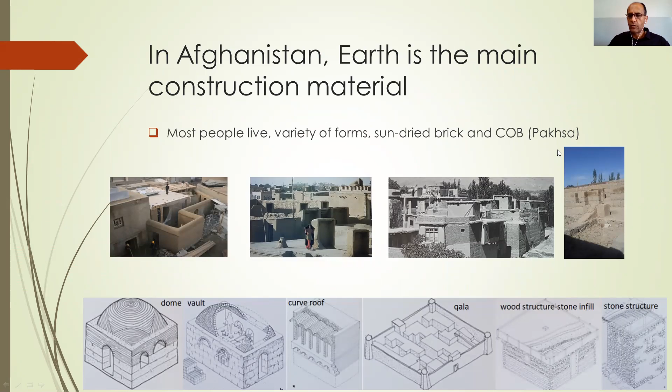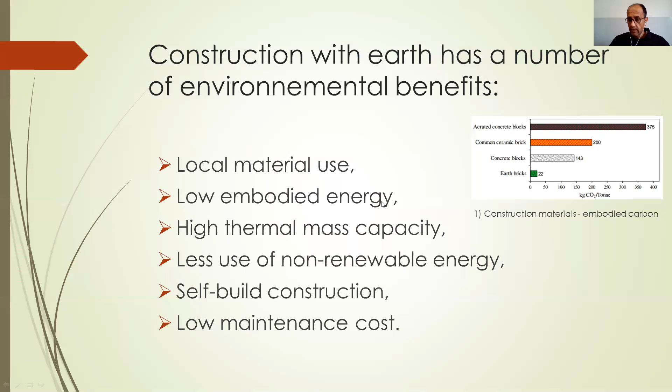Construction with earth has a number of environmental benefits, such as local material use and low embodied energy. As you can see here, earth brick has the lowest embodied energy compared to concrete. High thermal mass capacity, less use of non-renewable energy, self-built construction, and importantly, low maintenance cost.

In Kabul city, there were two rapid demographic changes. One occurred in 1979 and the other in 2001. This meant that we need to build a lot of affordable housing for people who migrated to Kabul. In 1979, when Russia attacked Afghanistan, all the people came to Kabul city. We can see in the graph there's a very rapid change.

Later in 2001, when the US Army came to Afghanistan, again a lot of people migrated to Kabul city, mainly for security reasons. There were better job opportunities and better education for their children.

Now in Kabul, around 70% of the houses are informal settlements. As you can see, they are all made with traditional earth elements, but we also have those people who can afford to use some modern materials. For Kabul city, based on UN Habitat, we need 41,000 houses to be built between 2015 and 2025.

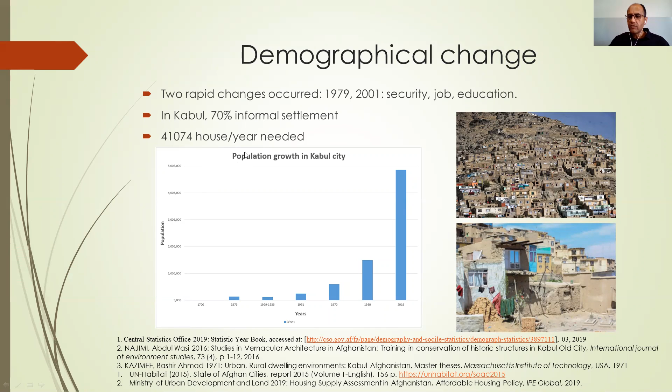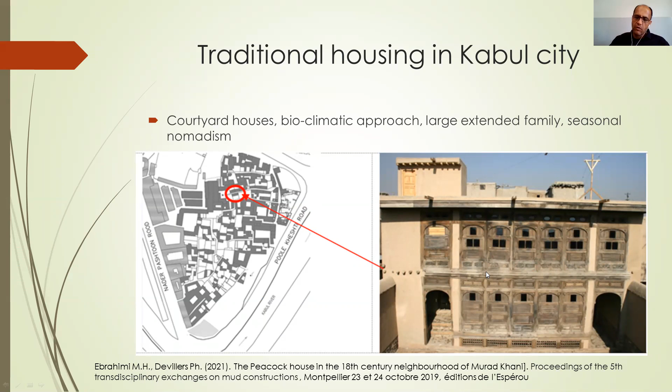For traditional housing in Kabul city, we have mainly courtyard houses. These courtyard houses have a bioclimatic approach. We can see on the south face we have a peak which prevents sun during summer and lets the sun enter the rooms during winter. We live in large and extended families, and we have south-facing rooms like this, which we benefit from during the winter, and north-facing rooms for summer.

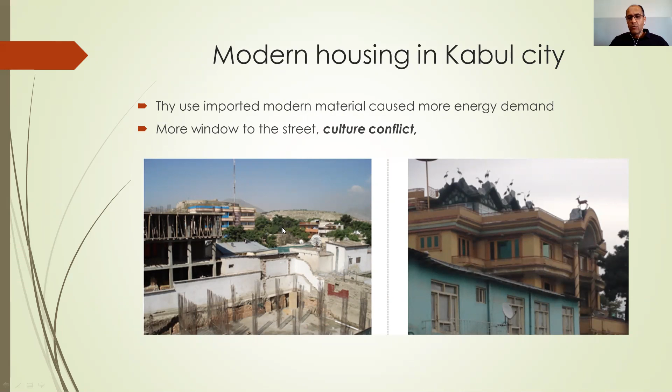The use of imported modern materials like concrete and steel, as we see in the structure, caused more energy demand for housing. We can see a lot of the houses newly built in Kabul use modern materials. They don't use a bioclimatic approach. There are a lot of windows facing the street. It's really a cultural conflict. So we need to use traditional materials rather than these modern materials.

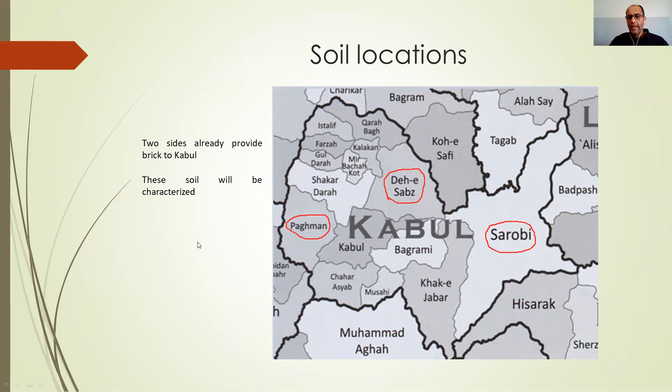For the soil location, we use three types of soil from 3 districts. 2 of these districts, Paghman and Deh-e Sabz, already provide bricks to the center of Kabul city. These soils will be characterized later in the other slides.

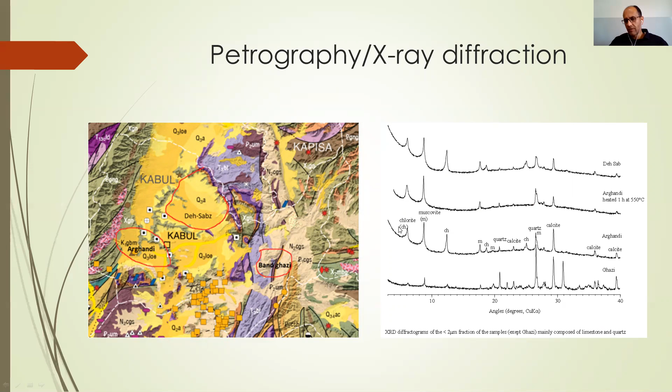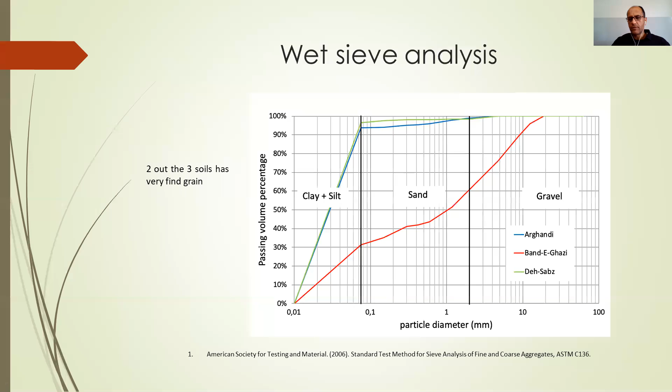Wet sieve analysis was performed to find the particle size distribution. 2 out of the 3 soils have very fine grain, Deh-Sabz and Arghandi. Deh-Sabz has almost 98% clay and silt, while Arghandi has 93.5%. They are both more than 90%. But Band-e-Ghazi is a well-graded soil, as we can see. For the Atterberg limits, we can see all 3 soils are slightly plastic.

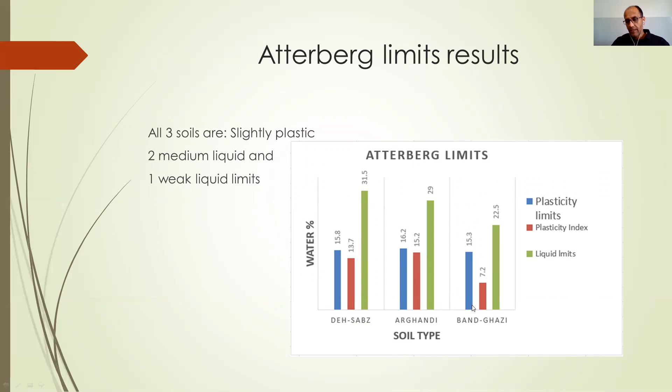The plastic index shows that they are slightly plastic. And Deh-Sabz and Arghandi have medium liquid limits, where Band-E-Ghazi has weak liquid limits.

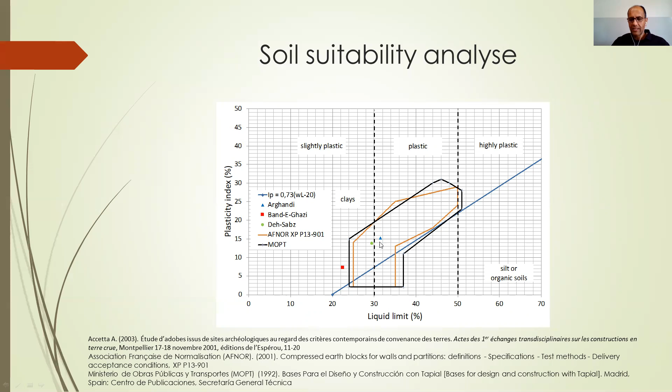For the soil suitability analysis, we use the AFNOR French code and the MOPT Spanish code. Both have developed polygons and show those soils which fit inside based on their liquid limit and plasticity index. They are suitable. We can see the soils are around there or inside this polygon.

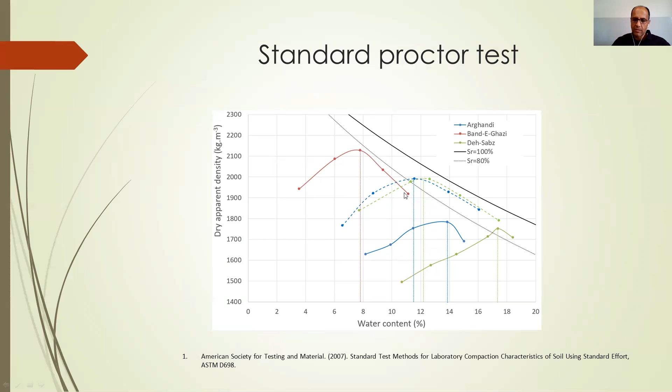This dashed blue and green line shows the reconstituted soil, because for compressed stabilized earth blocks, which use cement, these two soils are very, very fine grained. There's not a lot of sand, so we used around 75% sand with this, and this is the result for the dry density.

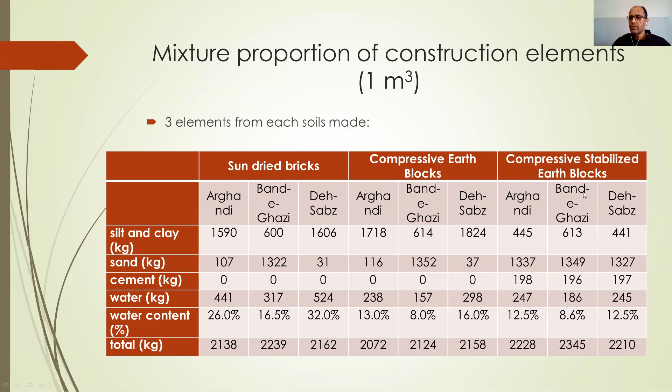For the mixture proportion, from those three soils, we developed three types of elements, like sun-dried bricks, which we use traditionally, and two modern elements like compressed earth blocks and compressed stabilized earth blocks, to which we add cement.

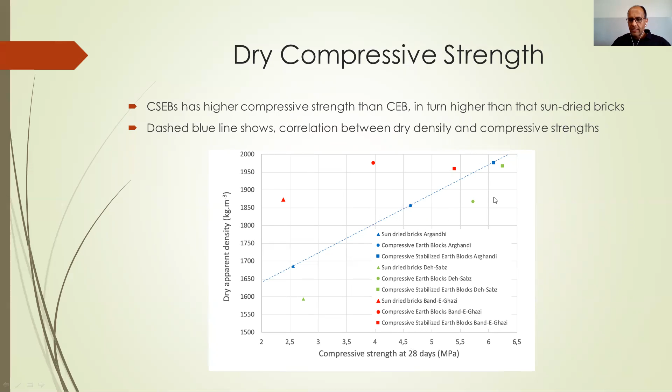The dry compressive strength of these three elements, sun-dried brick, compressed earth block, and compressed stabilized earth blocks, shows that CSEB, which has cement, has higher compressive strength than CEB without cement, and in turn, CEB has higher compressive strength than sun-dried bricks. This dashed blue line shows the correlation between dry density and compressive strength. The more the dry density is, the more compressive strength we get out of these elements.

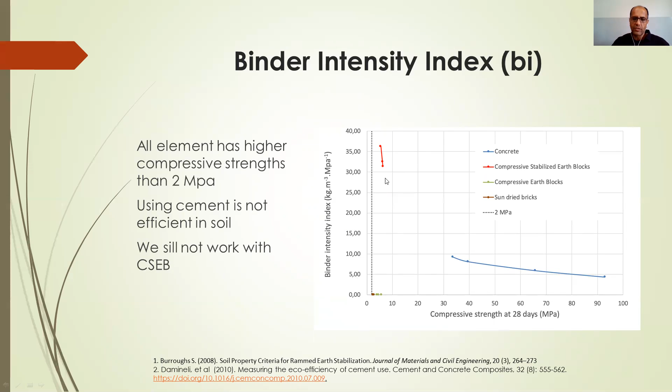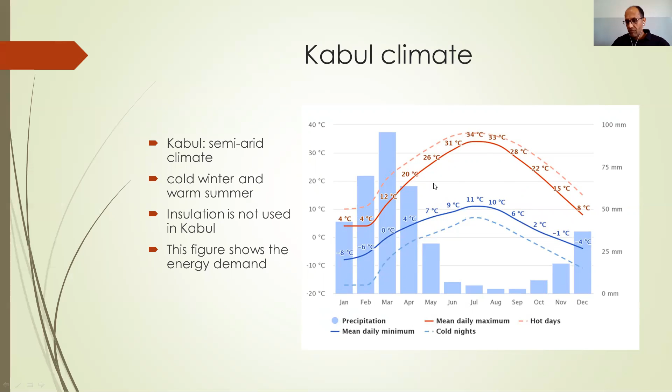For the Kabul climate, we have a semi-arid climate, which has cold winters down to -8 and warm summers up to 34 degrees. So this figure shows that there is an energy demand for Kabul, and we also need insulation because there is a big variation of climate between summer and winter.

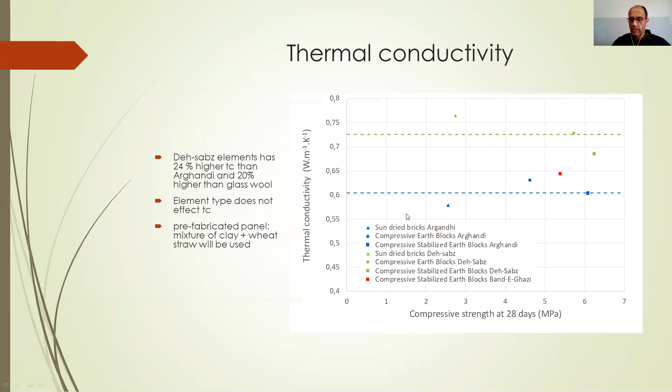The thermal conductivity, as we can see, the dashed green line shows the thermal conductivity for Deh-sabz, which is 24% higher than Arghandi, and 20% higher than the thermal conductivity of glass wool. Element type, whatever element it is, is not really affecting the thermal conductivity of this soil. And since the thermal conductivity is high, we need to develop a prefabricated panel mixture of soil and wheat straw to use for the external walls.

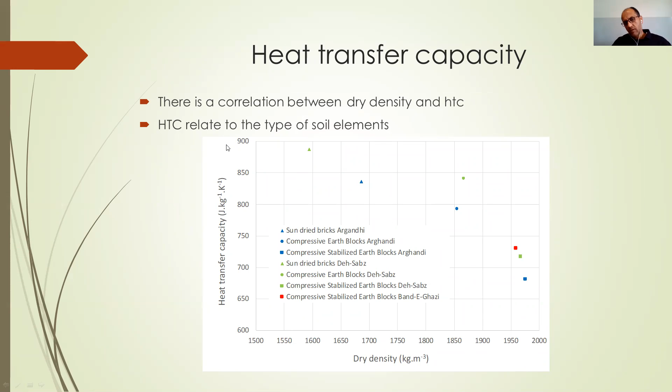The finding of this paper showed that the sustainable design for affordable housing in Kabul should necessarily learn from the past to invest in the local identity. The importation of Western-style housing revealed apparent cultural conflict and significant environmental issues. So we need to conserve the traditional housing system for Kabul city.

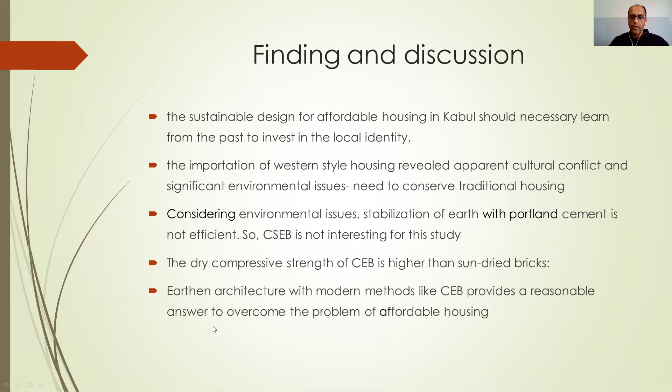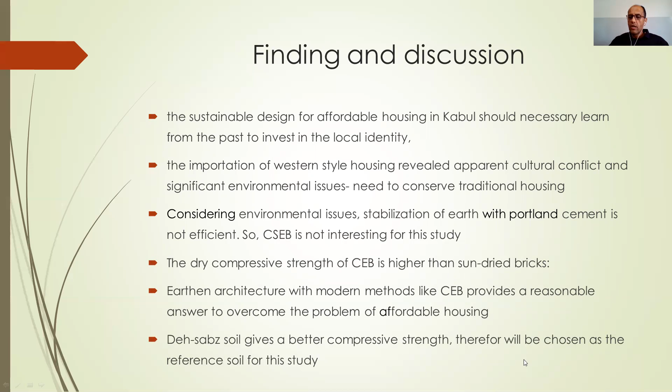Considering the environmental issue, stabilization of earth with Portland cement is not efficient. So CSEB, or compressed stabilized earth block, is not interesting for this study. The dry compressive strength of CEB is higher than sun-dried bricks, as we see on the figure. So earth architecture with modern methods like CEB provides a reasonable answer to overcome the problem of affordable housing for Kabul city. Deh-sabz soil gives a better compressive strength, as we saw. Therefore, it will be chosen as the reference soil for this study.